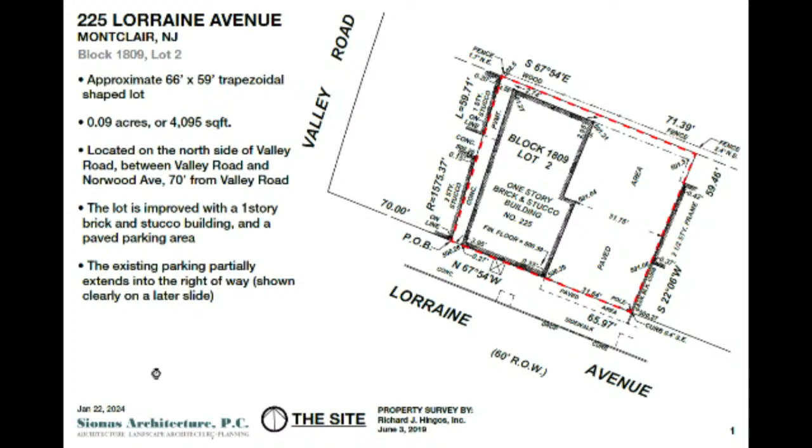On the screen, you see a property survey by Richard Hingos, dated June 3rd, 2019. The lot is approximately 66 feet by 59 feet, trapezoidal in shape, 0.09 acres or 4,095 square feet. It's located on the north side of Valley Road, between Valley Road and Norwood Avenue, 70 feet from Valley Road. The lot is improved with a one-story brick and stucco building and a paved parking area.

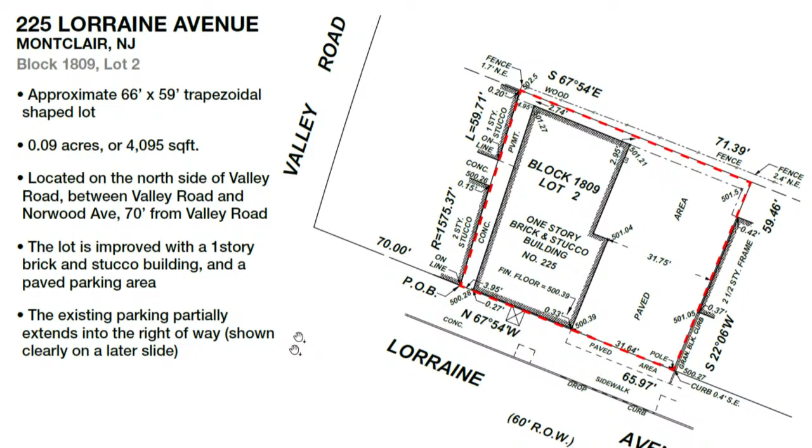The existing parking partially extends into the right-of-way, which is shown more clearly on a later slide that I'll talk about in more detail. Next slide, please, Marcelo.

Next page, please. Here we have some rear and alley views which are important to this application. The alley, as you see right here where I'm pointing, is on the property itself. This is a view looking to the south when standing to the west of the building, so to the left of the image is the cleaner.

Here's a view of a tree in the backyard, which the plans show to be removed. But since the date of this photo, that has already happened, so the tree is no longer there.

The property line in this photo is somewhere between the face of this building and the face of this fence. It's 2.9 feet from the face of the building in this corner, and it extends to 2 feet 11 inches in the corner, sort of behind where this photo was taken. Next slide, please.

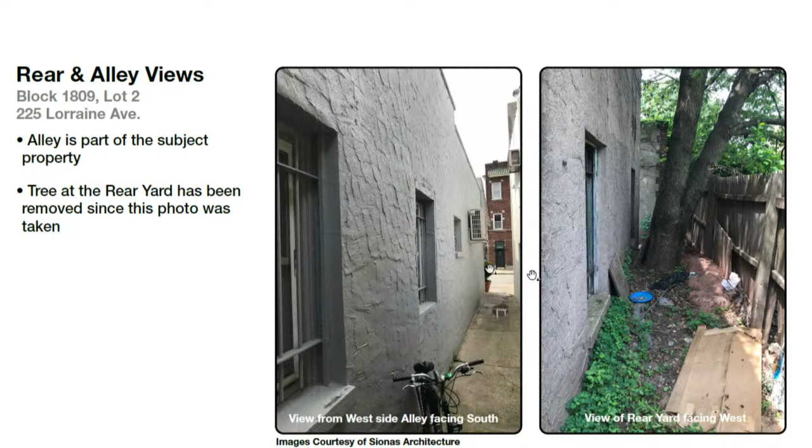Here's an image of the surrounding area, courtesy of Bing Satellite 3D view from 2023. To the east is that 2.5-story dental office. To the west is an auto shop, Veggie Heaven, and Williams Sonoma. To the south is Saunders Hardware on Valley Road, which is the previous location of Moline Kronberg from when it was started in 1911. It subsequently moved to the current location, 225 Lorraine, in 1940.

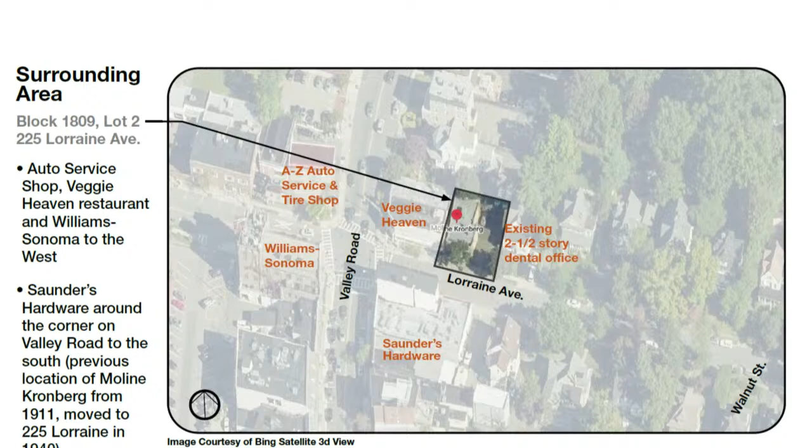The proposal — next slide, please. Here's the proposal for the application, which is to construct, as Alan said, a 2-story addition consisting of one dwelling unit and an additional office space. We intend to keep the dry cleaner operational during construction, so the proposed location of the stair to the second floor and the roof is located in that alley from the previous slide, right here to the west.

We propose new green roof spaces, a repaved parking lot restriped, as was testified earlier, to 6 tandem parking spaces, 1 EV charging station located right around here, and a new garbage and recycling enclosure located right here underneath the canopy extension, which is the second floor, kind of squaring this building off.

And here are the 6 parking spaces. I don't know if we need to talk more about this — well, I do.

Well, yeah, before you do that, just a quick question — the trash enclosure that's proposed, does that comply with the town ordinance? Yes. Okay, all right. Yeah, I think you should talk about the existing parking, which I think is shown on this slide, as well as the proposed parking.

That's right, let's talk about the existing first. Yeah, so I'll go to the first slide. You can see the dashed lines on this photo, which are right here, here, here, here, here, and here. This dash extends onto the public sidewalk. All of these spaces are quite bad.

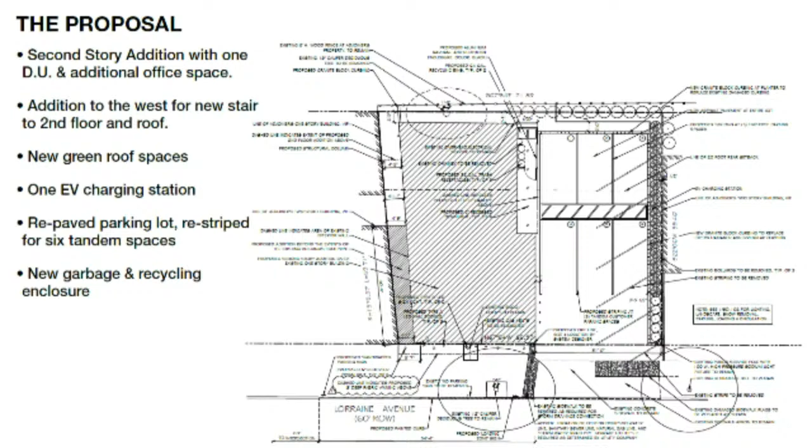This slide shows more information about the site. Here you see existing arborvitae right here. We propose to keep 11 of them, starting at this corner by the dental office, extending all the way to here, and eliminating 4 of them. This dark shaded area is a gravel area, 3 feet wide, between the curb and the planting bed, intended for snow removal or storage and vehicle overhang. The lighter shaded area here is the proposed gravel I was talking about.

The reason we wanted to remove the tree, which has already been removed, and develop the back here a little bit, is because we wanted to be a good neighbor. Since we plan to take this alley, and we don't know how people in these 2 existing buildings use it, but it is our property, we wanted to ensure that in case of an emergency, if someone needed to get out through the rear, we have a clear path for them, free of obstructions, so they could walk on the property and go behind our building to get out in the event of an emergency.

Was a tree removed in anticipation of this design? I'm not sure, did you have to cut it because something happened weather-wise? Yes, because it fell on the roof halfway. Oh, that's a good reason.

So I have another question about this slide. I think I saw in your presentation that you have agreement to close up Veggie Heaven's windows. We have reached out to the neighbor. I don't know if Alan wants to speak. I can address that, because I know this was an issue brought up at the DRC.

The zoning allows us to go right up to the property line. There are 2 windows on the first floor at the rear of the Veggie Heaven restaurant, which would essentially be closed if we do what we're allowed to do, which is extend the building to the property line. So you're allowed to extend the building to the property line even though there would be windows on the adjacent property? Correct, yeah.

There's no exception for that, and I do want to tell you, and I can provide a copy of this because you raised it at the DRC meeting, about letting that property owner know. I wrote a specific letter, in addition to sending the legal notice to all the property owners. I wrote a separate letter, sent by certified mail on January 9th to the owner of 631 Valley Road, in which I specifically told them what the plans were and the fact that we're proposing expansion of the building to the property line, and although it's legally permitted, I nonetheless wanted to bring this to their attention because the expanded building will block the existing windows on the eastern side of their building occupied by the Veggie Heaven restaurant.

Again, that was sent out. I haven't received any response. It's the most we could do. I made multiple copies of this, not that you need them.

All of these updates result in a slight decrease in the impervious coverage due to the gravel and planting areas, but very slight. We went from 94.6% impervious down to 94.33%, where only 80% is allowed. So this is a non-conforming condition that we need relief from.

This plan also shows the foot candle calculations of the public service pole, which is right here, that currently illuminates the whole parking lot adequately. It's on a timer, and we gathered information about that pole and show the foot candle readings. There is one that is under the 0.5 required - it shows up on the plan right about here, it says 0.4. But we should probably get an accurate reading of what exists, and we could provide supplemental lighting in that area if needed.

Next slide, please. I do have a quick question on this. You don't have an engineer who will be testifying?

So you're not touching the elevation of the current lot. Can you just describe how the drainage works now? Right now, this is the high point. It all pitches, and all of this is surface runoff on the parking area. All the roof drainage collects and empties out - you can see it in one of the photos in the drawing, the sheet with existing condition photos. You can barely make out a pipe outlet right here and another right here. That connects to the roof drainage, and we intend to connect to the same. So this entire square footage of drainage handled by those underground pipes would be the same. And the survey shows it as being almost dead flat.

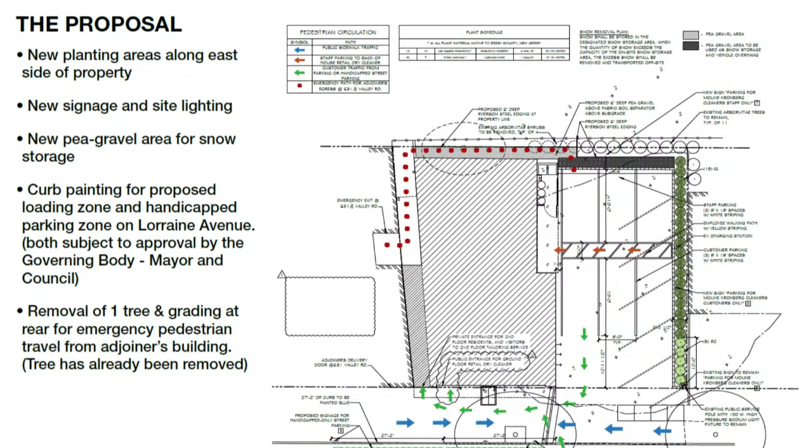While we're talking about the drainage, going back to that curb in the back left that's going to be removed - does that have any effect on the drainage in that part of the site? I don't have the elevation there, but I know this is the high point of the site. We could rough grade below the pea gravel to make sure we have sort of a swale to pull it out. But that's the best I know about that right now.

These underground pipes, have you investigated them? Are they operational? They're operational, right, Marcelo? Yes, they are. When it rains, you see it coming out, and you don't have any problems or leaks in the building? No, since it's already a flat roof.

Okay, we're ready for the next slide. So here we move on to the floor plans. The first floor is an existing 1,818 square feet, inclusive of 128 square feet here for the addition where the stair is. We propose a new storefront system in the front here.

The first floor business operation is mostly unchanged in this plan except for this area, the counter area where you come to pick up and drop off. There's a small space that exists right here, which I believe is where Marcelo is now forced to do tailoring, right in the picture window - no privacy, and very small space for workers and people. Like he said, he's getting a lot of demand for wedding gowns and would like a more private space.

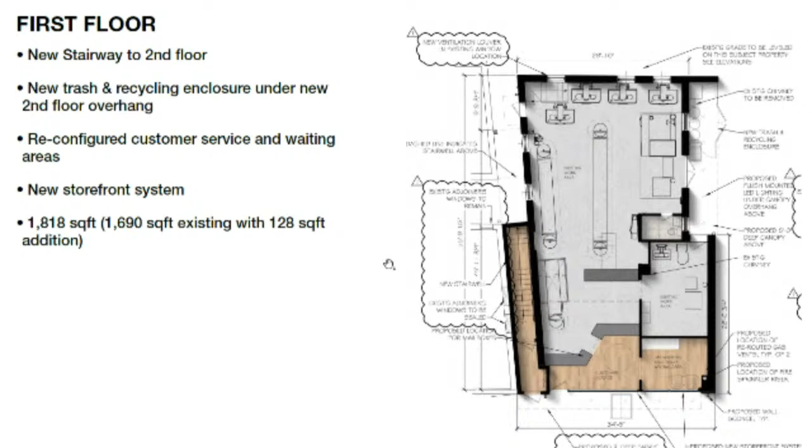Where the buildings are joined, it might be too much detail, but do you seal that up? They're literally touching each other or within a half an inch or so, and then that little gap, do you seal it from the top so that there's no intrusion into it? Well, yeah. So do you need an agreement with your neighbor to do that, to essentially join the buildings together? Well, we'd have to flash it properly. But to touch their building, you can't touch it and affect it without some sort of agreement, I would assume.

Well, I believe we're allowed to put our wall up to our property line. And if it is razor thin and they're touching the property line, I believe we're allowed to construct. And if a CMU block is touching a piece of their stucco, I believe that's allowed. But I haven't got to that level of detail about what happens at the top where you flash, because that drip may overhang. I'm not sure. It seems like, although we can't necessarily require it, it sure would be nice to see that there's some agreement.

Yeah, so we're working on correspondence with them, waiting to hear back. We're trying to do it, we're going to have our way to be cognizant of the neighbor, give them additional notice, and also construct that emergency egress to the rear, which I don't think we're obligated to do. But that issue is something we would certainly communicate with the neighbor about.

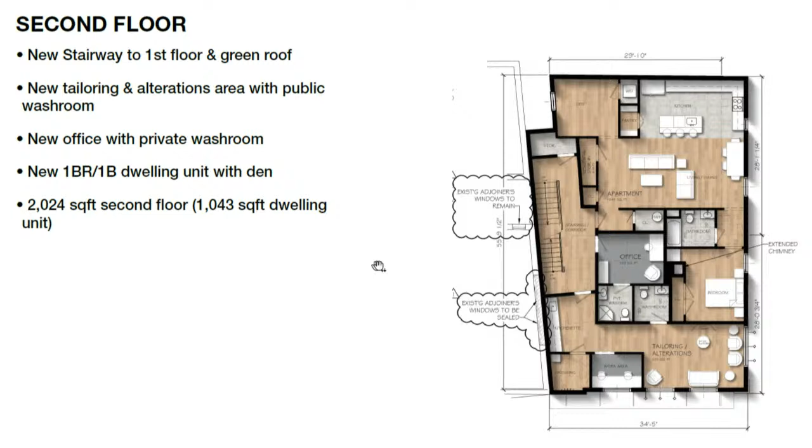So on the roof, we have a new green area for the enjoyment of the applicant and/or possibly the resident, and possibly patrons, depending on what Marcelo chooses. The solid parapet at the rear is 42 inches tall at the equipment screen area, and the equipment screen and the metal railings that show the plantings all match that height.

We proposed some potted trees in the southwest corner and interesting perimeter plantings behind the railings in these two areas. We originally wanted a glass railing with plantings behind, but HPC frowned on that, so we've changed the design to take their comments into consideration. I thought we wanted a solid parapet, period. Yeah, we made this piece solid, and we kept railings in between here and here. But this is solid, all of this is solid from there to there, and this corner chunk.

What about the front on Lorraine? This is not solid, and this is not solid. Isn't that the metal rail we have now? Specifically referenced at the meeting, was to make that solid and to make it blend in more with the neighborhood? Right, yeah, I think that was the HPC recommendation. We took all the HPC recommendations and did a few of them and are proposing what we're proposing. We've changed the windows, we can talk more when we get to elevations, because that's where all those things kind of show up.

Just to clarify, the green roof, the 3 pots there, and the pavers, how are they green? Is there any grass on the roof? Well, this is plantings. Those are plants, potted plants, right? Potted trees here, and under the pavers this is plantings, which is sedum. But we've also got a comment that they wanted to see more green space, so I have a rendering later that shows how we can make that even more green. The renderings will really show it, it'll show up in the PowerPoint.

The HPC had that comment? And that may be in a DRC comment. I wasn't at that one. I was there, I don't remember that. Oh, no? That was Paul's notes to me.

Who will use the roof? Well, the applicant has access all the time. Depending on who the resident is, they could choose to give them access. And depending, I suppose if you wanted to measure someone for a tailoring upstairs on a nice day, they could bring customers up too. But definitely the applicant, and everyone else is undecided, undetermined. Tenant access, depending on who the tenant is and the agreement, yeah.

Well, how are those potted trees secured in inclement weather? I guess I don't know the answer to that. Yeah, well, I don't think I like that hope. Can't cross our fingers and hope they don't blow over on somebody. Big heavy pots. Yeah, very heavy pots. I mean, I suppose they could be secured somehow. Yeah, not just cross our fingers. And so will the furniture, there'll be an umbrella, maybe someone will put an umbrella on a table up there. It would have to be secured.

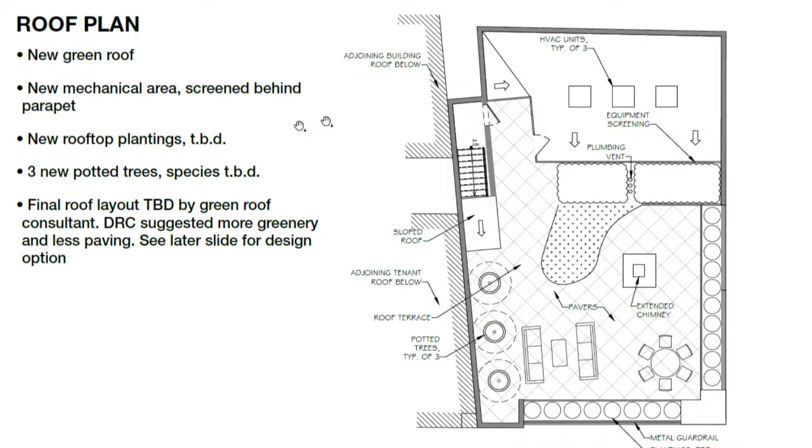Okay, next slide please. Just one last thing on the air conditioning units. Per the township ordinance, they can't be connected directly to any storm sewer, house drain, water leader, or other waste pipe. Can you describe how you're complying with that? Sure, we could run the condensate lines through the roof screening and empty onto the green roof system so that it could evaporate or percolate into the green roof plantings.

Okay, the next floor slides are the proposed elevations. The materials that we've chosen are brick to match existing, stucco in a light brown or beige color, black windows, black storefront, and black metal railing up on the roof.

On this south elevation, to the top, you can see the tops of the potted trees and decorative plantings behind the metal railing. The upper floor is a stucco finish with casement windows, redesigned as a response to some of the feedback we got from HPC.

There are proposed LED sign lights right here under these three windows, which illuminate the sign. This is a 16 square foot sign, showing the actual existing sign to be relocated.

On the next elevation, on the next page, there's a 31 square foot sign facing the parking lot, where existing there's a 40 square foot sign. So the Lorraine Ave sign complies with size, but the parking lot one does not. So we've at least reduced the size of the parking lot one to help with the variance request.

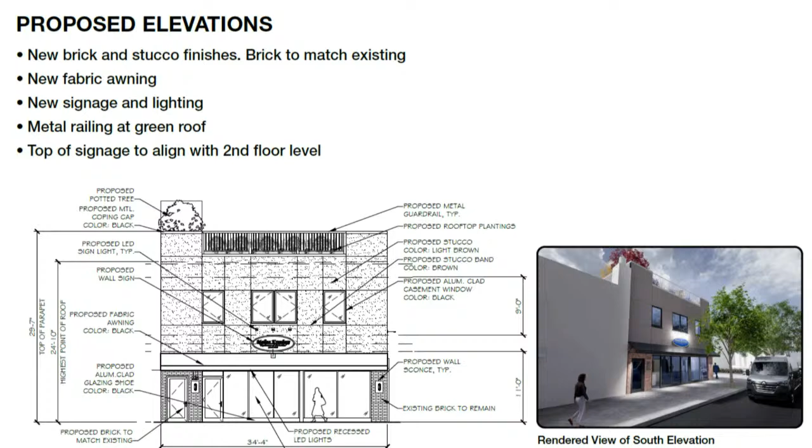Before you go to the next elevation, can you talk about the lighting proposed within the canopy? Yes. We found a spec of the same model and look as these lights that illuminate the sign. The same company makes a wall pack we plan to hide underneath the awnings, mounted to the wall. We had shown recessed lighting when it was a metal canopy, but now we can't do that, so we need another way to illuminate. Right now, Marcelo has LED lights that illuminate the storefront on a timer, turning off at midnight—we'd probably do the same thing. It's just accent lighting that wouldn't contribute to the foot candle requirements. On the other side, we have a metal canopy, so I'll talk about those lights when I get to that slide.

As Mr. Graham noted, they suggested we have a solid parapet, but it was important for the applicant to have a very visible green roof, and he wanted it to be a lively environment. But that was one of the issues discussed. It was determined that it was not compatible with the neighborhood historic character of the historic business district. So that was the reason why that was presented.

I thought the statement was that the whole aesthetic didn't fit, and it wasn't just that the solid parapet was part of it. I mean, I can read the report - glass, like the glass, that's what they said, which is different now. I remember it was glass.

That was one, I mean. We're making substantial improvements to this building, and we've got the large Veggie Heaven building there, which doesn't contribute to anything in my mind historically or architecturally. And the HPC said the same thing. We didn't have an issue with the improvements, with the second floor, with expanding the business, the changes to the business. It was just certain design elements that did not match the character of the district.

I would think this would be something that should be reviewed by either a subcommittee or the commission as a whole. Well, again, HPC's role here is advisory to the board, so it's really up to the planning board. If you want to send this back to HPC - I mean, we've designed something that we think is reasonably compatible.

On that point, if we were to judge, how does one judge general compatibility with a district? It's the purview of the HPC. And we've made recommendations, one of them being, one of the sole ones being the solid parapet. Well, okay, then how would the HPC make its judgment that a railing is not compatible? There are design guidelines, there are national guidelines, there's a lot of resources that we pull from to discuss.

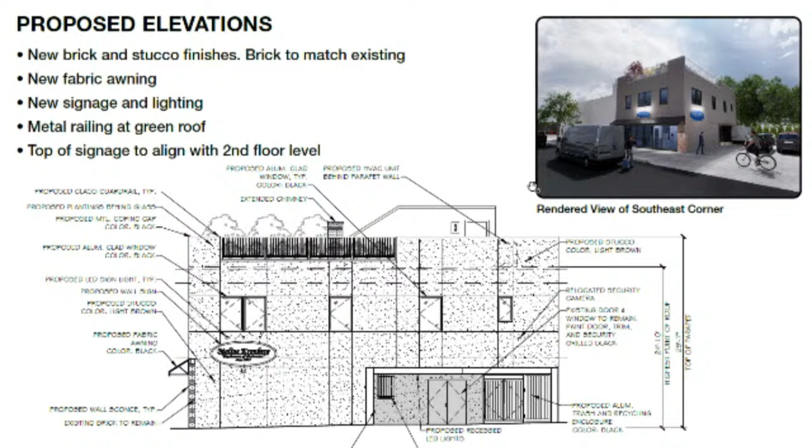And here you see the mounded grade we proposed - the tree is now gone, so the grade can be leveled out for that egress path. This is where someone could be in this adjoining building and exit out. Since they can't turn right and go through the alley, we'd like to at least accommodate so someone can safely get around the back.

Does that need to be ADA accessible? No, because it's not a public entrance or an accessible entrance, that rear.

Next slide please - actually, before you move, I just want to confirm that existing grade line. It looks like that curb blocks flow onto the adjacent property, so just to confirm, that's going to be regraded to go out towards the parking lot, so it drains back towards Lorraine.

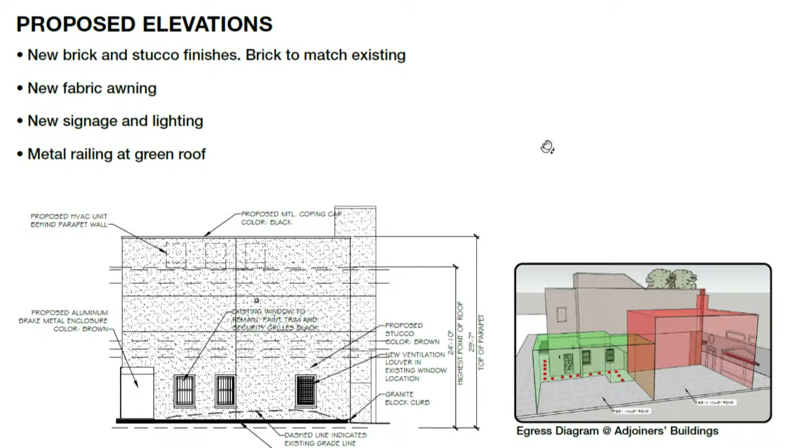So this is the area someone could exit right from here and travel towards that window and hang a left. And this is the outline of the other adjoiner.

Are there any requirements on distances between the discharge of a radon pipe and operable windows or doors? Well, the discharge of the radon pipe is up above the roof - it goes all the way up to the roof and empties into the air.

Sure, and it looks like the top of the stairway has a door? No, that's a dashed line of the door that exits onto the roof. We're not allowed to put a window that close to a property line - the windows they have existing are against code. You can't have a window right at a property line for this reason, so no, we don't have any windows proposed anywhere near that.

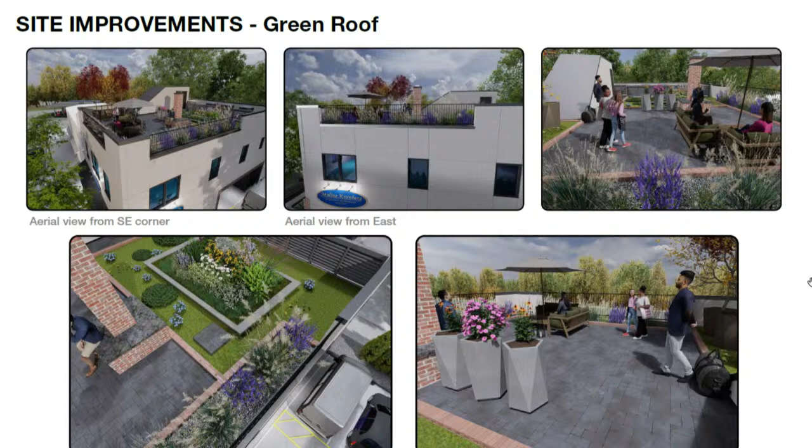This is just a juxtaposition so you could see how that would look. What was submitted in the drawings is the roof plan you see here, and this is the rendering of the roof plan, which you can see has much more green.

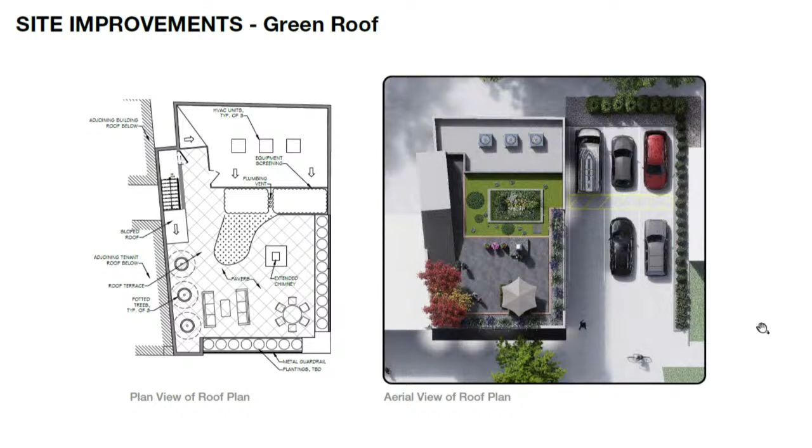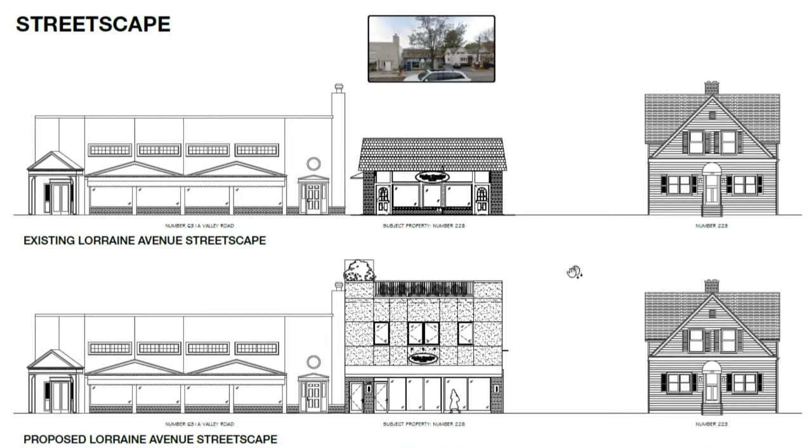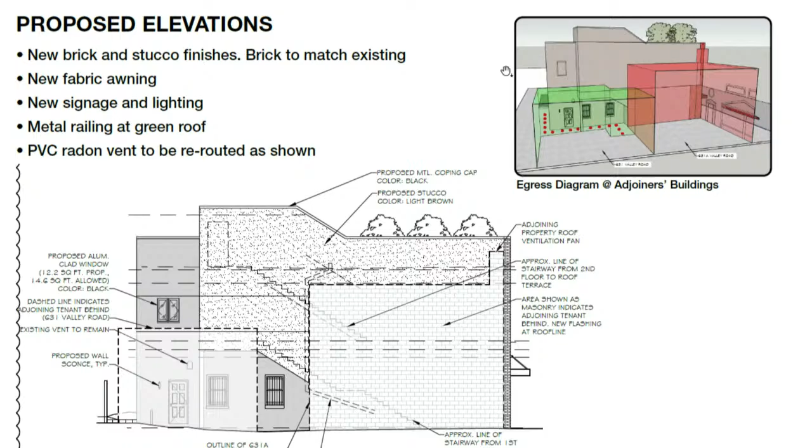Is that a smokestack, exhaust stack coming off the restaurant, on the top of the building? Yes, this is an exhaust - no, it's an air vent. So where does the restaurant vent its cooking? I think it's in the back, on the north side. They have a ventilation towards the north. It's a stack in the back, made out of aluminum I believe, sitting up nice and high, which is a good place for a vent from a restaurant. It's elevated above the roof. I may not really be able to see it on Google because of the way the buildings are. We're going to be touching that chimney, but there's nothing there except the potted trees, which would be on the other side of the air intake - if it's intake or exhaust, I'm not sure. Okay, we can come back to this if necessary. Maybe go to slide 13, that shows the area the chair is talking about. Right here is where that chimney is. We don't show the outline of the aluminum on top, but where that's occurring we would butt up next to that chimney, and on the other side of the ventilation is just our potted trees. Ventilation is not a problem, cooking exhaust would be, so that's what I just want to make sure of. Okay, last slide is just the renderings, so I'll leave it there and turn it to Mr. Tremblay.

Yes. Ms. Talley? Janice - you're right, it's wrong in the rendering there, and it's updated on the elevation, so the elevation would wrap the corner. Yep.

Okay, I think you covered everything. I had noted in the Boswell report - I'm sure Mr. Byrne has anything else - just one or two minor things didn't address. I know it was briefly mentioned much earlier about the van operating, using the loading space out front, assuming it's approved and everything - what hours would that be?

Would that just be during business hours, or what hours would the van be parked? It would be after business hours - what time does your delivery van come back, and what time does he leave in the morning? He leaves at 8, comes back a couple times a day, but then parks around 5 or 6. The loading space would be restricted from normal parking during business hours, restricted to only the van, for the brief moments he's coming for a refill on deliveries. But that's a good question - then that loading dock area is available for people to park after, say, 6 o'clock, right?